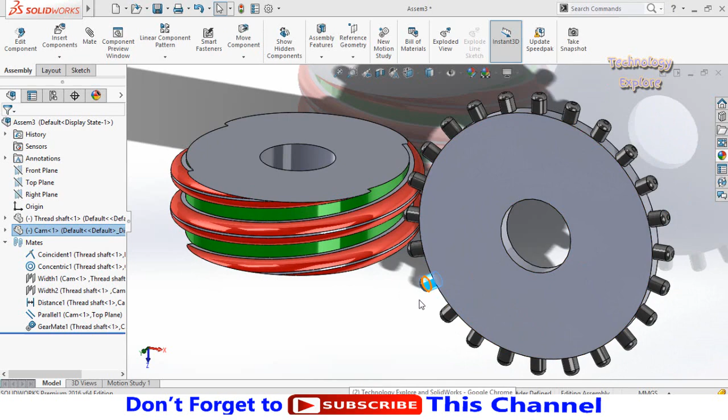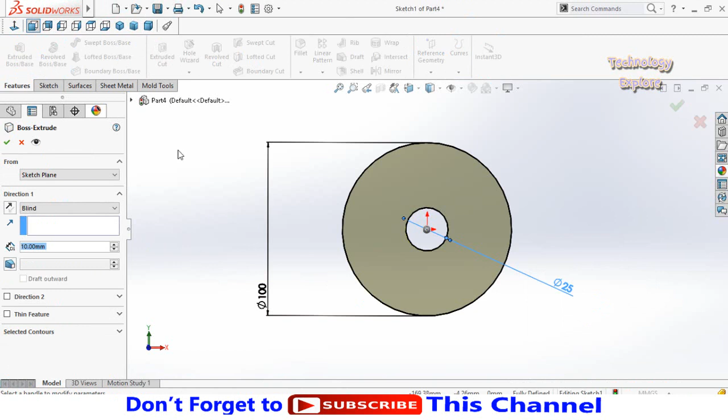Okay, let's start. First of all, I'm going to design the gear or thread shaft. Sketch on the front plane and draw two circles, starting them from the origin. Define them: this outer circle has a diameter of 100 millimeter and this inner circle has a diameter of 25 millimeter. Then go to the Features tab and apply the Extruded Boss/Base command. Extrusion length is 30 millimeter, and press OK.

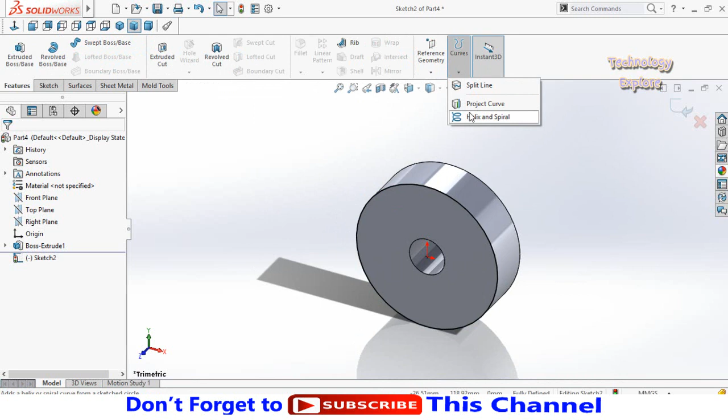Now click on this face and sketch on it. Select this outer circle and press Convert Entities. Then go to the Features tab and click Curves, then select Helix and Spiral. Select Height and Revolution. Scroll down: height is 30 millimeter and revolution is 1 in this direction. Press OK. Then click on Boss Extrude 1 and hide it.

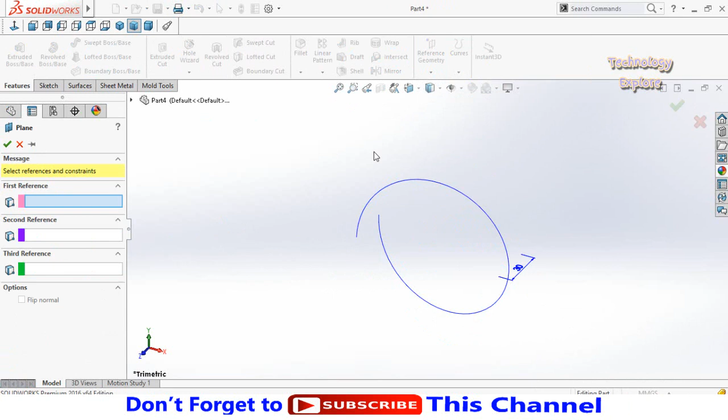Again go to the Features tab and click Reference Geometry, then select Plane, to create a new plane. Select this helix as the first reference and this point as the second reference. Press OK to create it. Now unhide Boss Extrude 1.

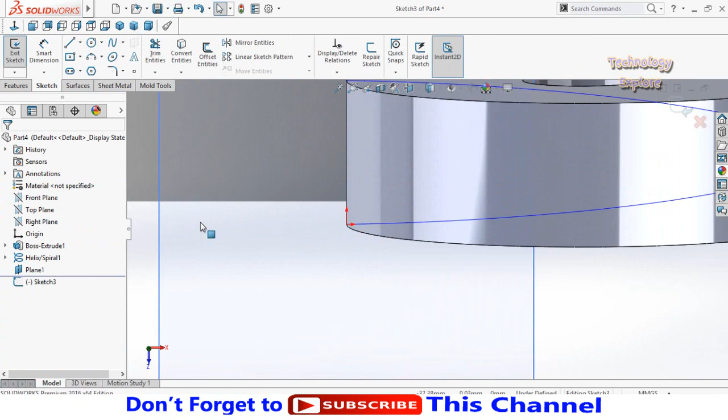Now sketch on this Plane 1, make it normal to, and draw a center rectangle starting from the origin. Define this width as 6 millimeter and this height as 12 millimeter. Press OK, then press this button to save and exit the sketch.

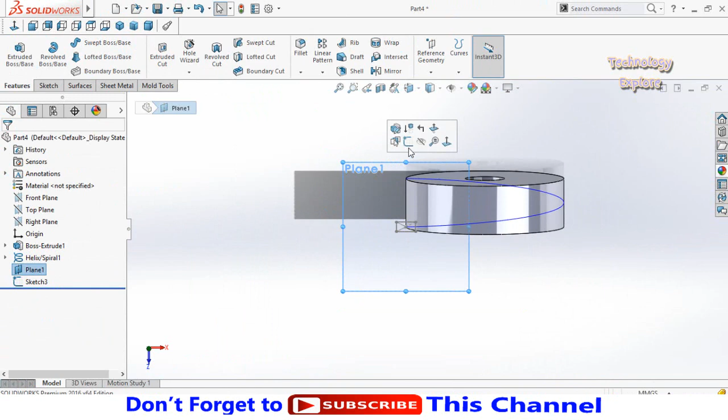Now hide this Plane 1. Go to the Features tab and select the Swept Cut command. Select this rectangle as our profile and this helix as our path. Press OK. Now select this helix and hide it.

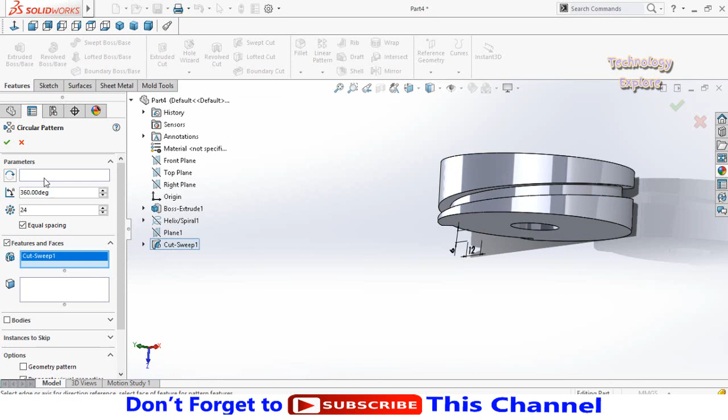Then click on the arrow below Linear Pattern and select Circular Pattern. Expand this tree and from here select Cut Sweep 1 as the feature to pattern, then click on this Pattern Axis box. Select this circle. Type quantity 2 and make sure Equal Spacing is checked. Then press OK.

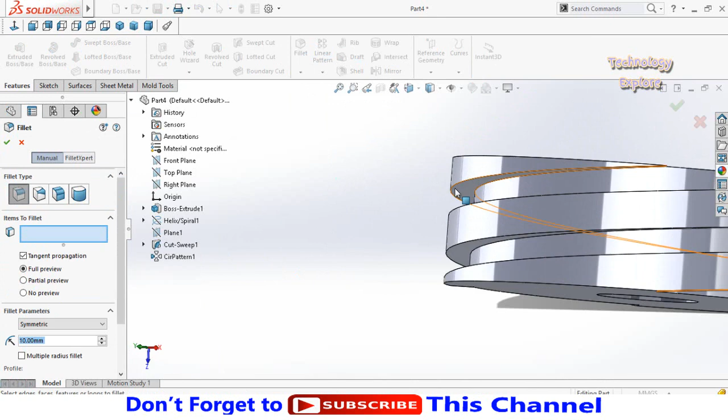Next step, select the Fillet command. Select this edge. Fillet radius is 4 millimeter. Then select this edge, also select this edge and this edge. Now press OK.

So save this part. Now again press Ctrl plus N on your keyboard to start a new part. This time I am going to make the cam or gear.

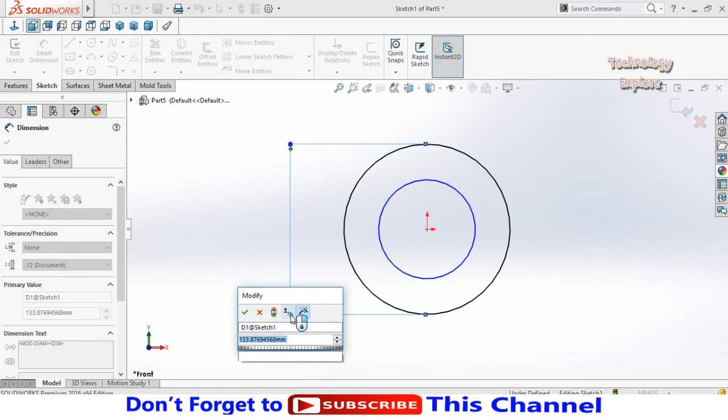Sketch on the front plane, then draw two circles again. Define them: the diameter of the outer circle is 100 millimeter and the inner circle has a diameter of 25 millimeter. Then go to the Features tab and apply the Extruded Boss/Base command. Extrusion length is 6 millimeter. Press OK.

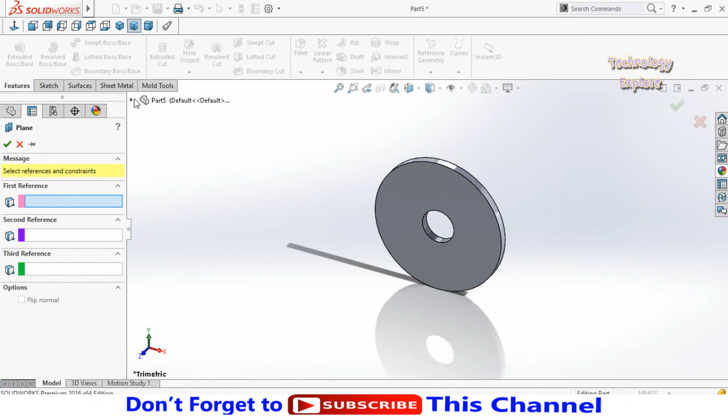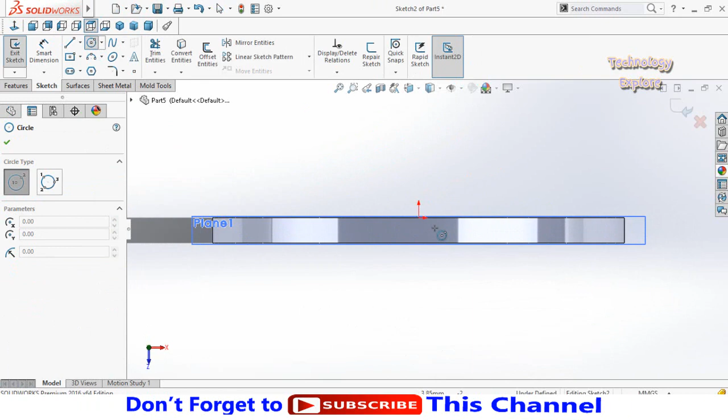Again select Reference Geometry and create a new plane. Expand this tree and from here select the top plane as the first reference, and type the distance 57.46 millimeter, then press OK. Now sketch on this Plane 1, make it normal to, and draw a circle. But before drawing the circle, draw a center line starting from the origin up to this line.

Now press escape button, then draw a circle on this midpoint up to this line. Press escape button. So you can see this circle is fully defined.

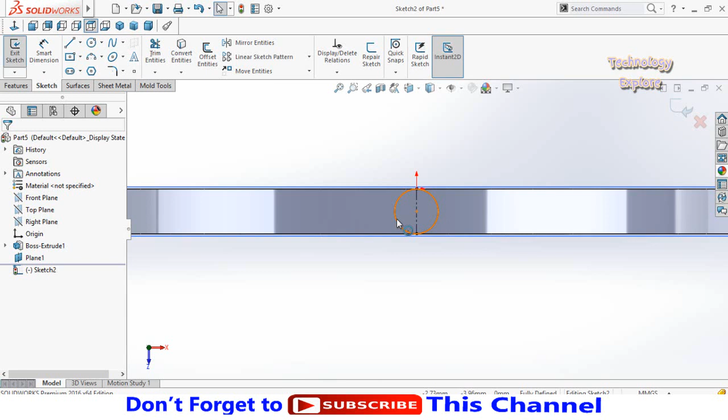Now go to features tab again and apply the extruded boss base command. Double click on this cylindrical face and press OK button.

Now select this plane one and hide it. Select fillet command from features and select this face. Fillet radius is 2 mm, press OK button.

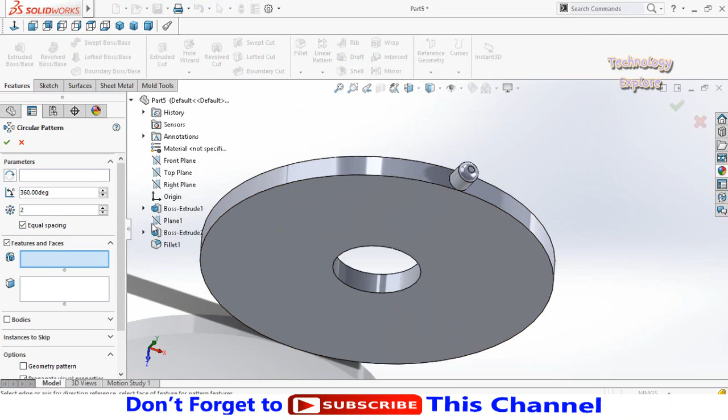Now again select circular pattern, expand this tree and then select boss extrude 2 and fillet. Now click on this pattern axis box and select this circular edge. Type here the quantity 24 and press OK button.

So this gear disc is also designed. Save this disc. Now we have to assemble both of these parts in SolidWorks assemblies. So for that, start from new and then double click on assembly.

Import both of these parts in the assembly. So first of all, try to drag this so it is fixed. Right click on it and then make it float.

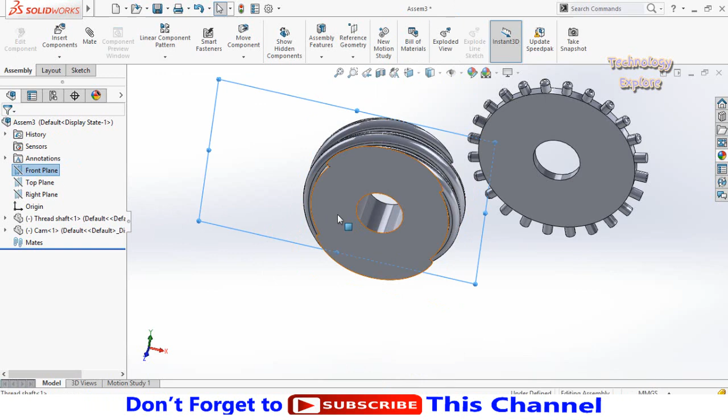Then select front plane and this face, make their relation coincident. After that, select origin and this cylindrical face, make their relation concentric.

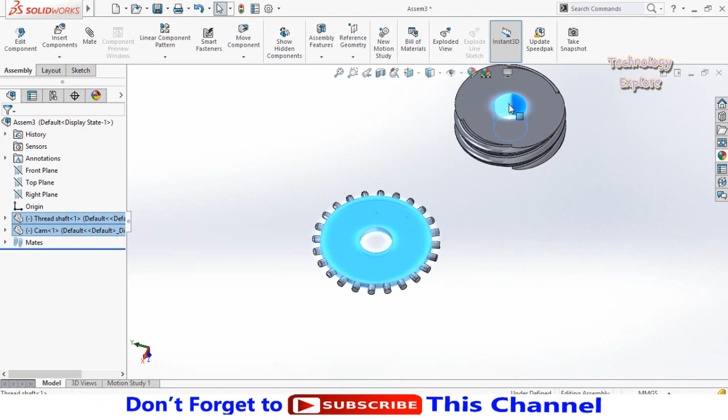Next step, select this face and this face. Then select this cylindrical face and make width mate.

Also select this face and this face. Then select this cylindrical face and make width mate.

Now select this face and make normal to. Zoom in and then manually adjust the gears.

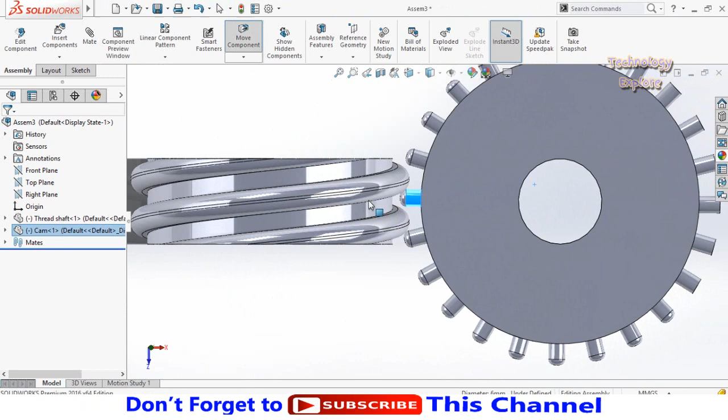Then select this cylindrical face and this cylindrical face and make distance mate. Leave this distance as it is, press OK button.

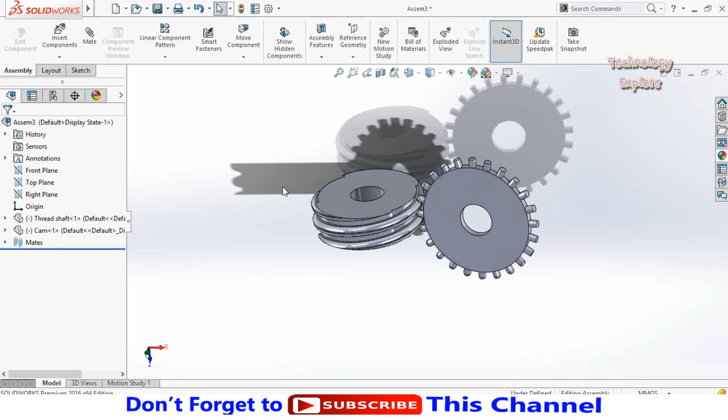So one last mate. Select top plane and this face. Make their relation parallel.

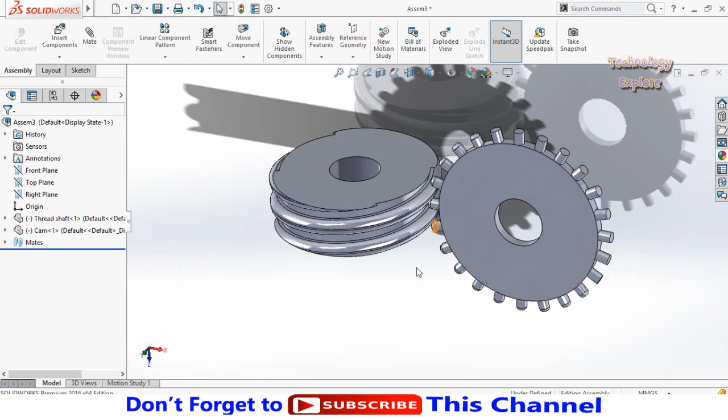Again make normal to this face and arrange the alignment of both gears. So now finally we are in a position to apply gear mate to our parts.

So for that, click on mate here and then scroll down, expand mechanical mates, and in the mechanical mates select gear. Select this cylindrical face, and as you know we had two threads, so type 2 as the number of teeth or diameter.

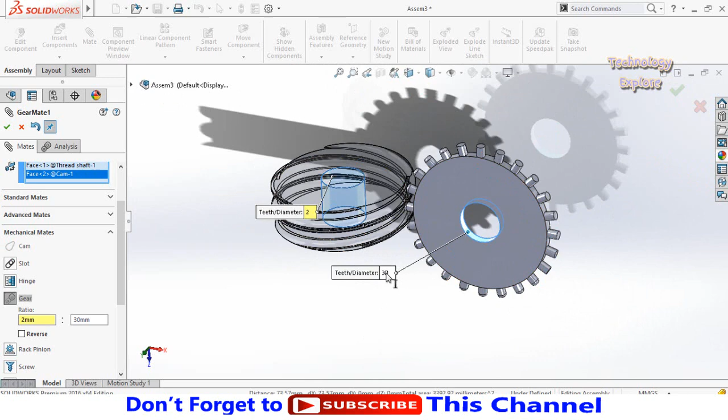Then select this cylindrical face. So we had 30 teeth on this part. Type here 30 and press OK button. Again press OK button.

Now let's try to rotate this part. So you can see from here we had mistakenly created the gear mate in reverse direction. So we have to adjust this mate.

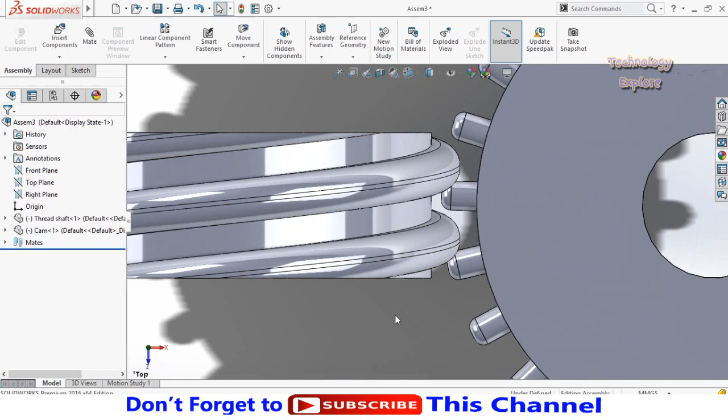So for that, expand the mates tree from here and then click on gear mate. Then edit feature, scroll down and check this box reverse, and press OK button. Again press OK button. Now let's try to rotate it.

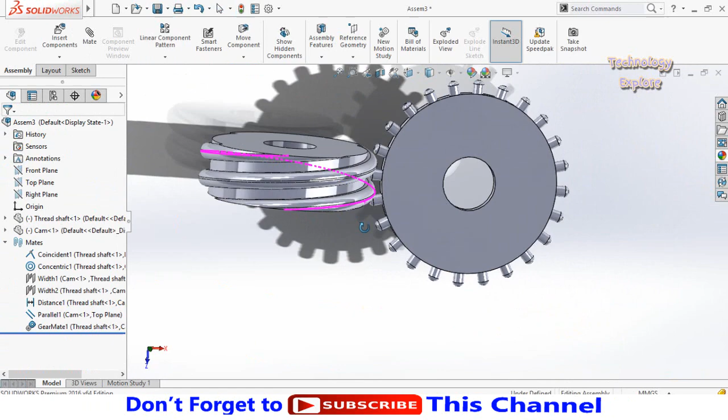So now it is working perfectly. If I make normal to, then see how it is working.

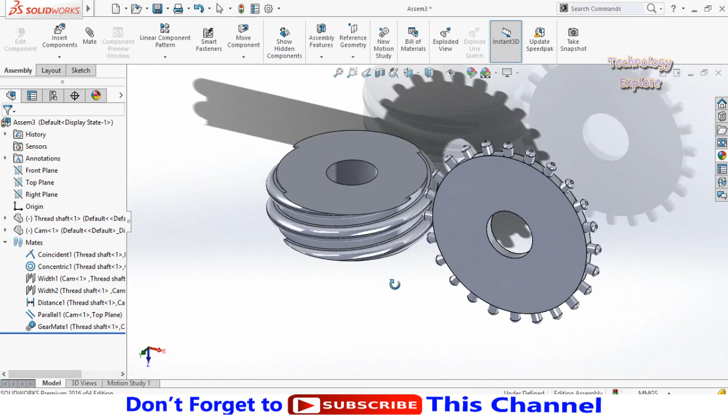So now let me show you how to make its animation. So before making animation, let's change appearance. Now let's make a small animation.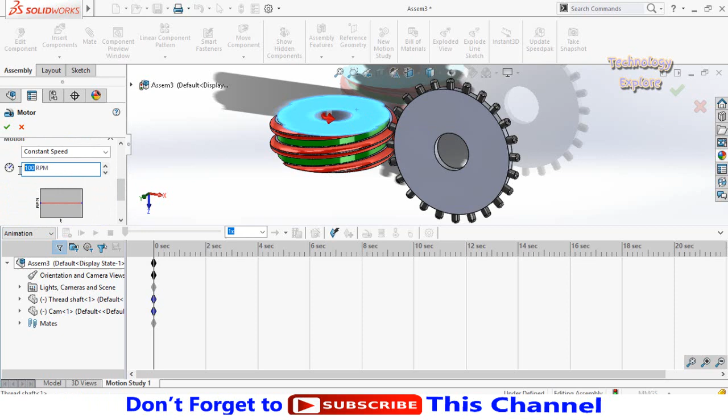First of all, select the view orientation for your animation. Then click on motion study 1 here, and from here select motor. Then select this face, and from here you can reverse the direction of rotation. Scroll down and then type here RPM, let's say 20 RPM, and then press OK button.

So in the timeline you can extend the time up to 8 seconds or your desired time. Then press this button, calculate.

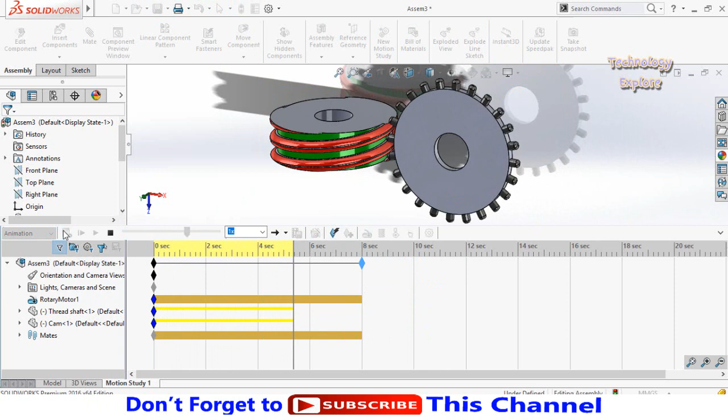So all done. From here you can save this animation in your hard drive.